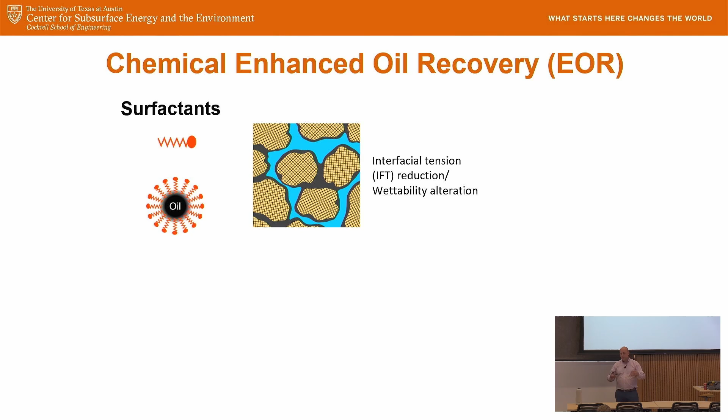Surfactants are designed to reduce the interfacial tension, change the wettability, and get some of that capillary trapped oil. Surfactants are basically like detergents or soaps, the same way you clean your dishes or clothes in the washing machine. It reduces interfacial tension so you're able to produce some of that oil, intended to capture the capillary trapped oil.

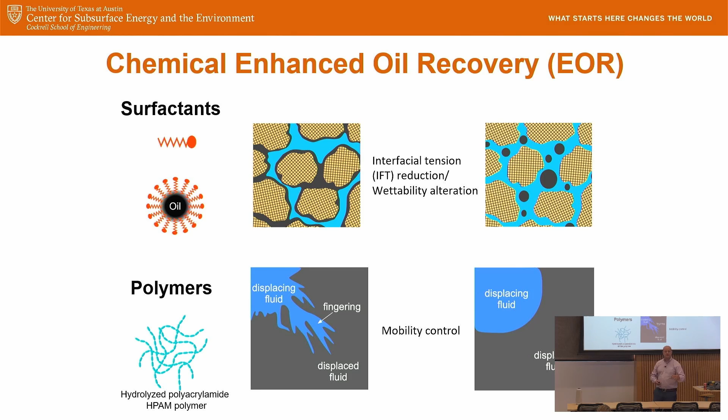For the unswept oil, that's what we use polymers for. These are usually aqueous-based polymers, thick fluids, kind of like the consistency of hair gel. They're intended to improve mobility control, so instead of having poor viscous fingering, you might get a more piston-like displacement. Key thing about polymers is they're intended to get that unswept oil, not the capillary trapped oil.

Conventional wisdom and theoretical analysis says polymers are going to get the oil out sooner, but not get more of it, meaning they won't get the capillary trapped oil. What I hope to show today is that when polymers are designed and tailored with the right rheology, they can actually recover some of that capillary trapped oil, or what I'll call residual oil saturation. That's what I hope to show.

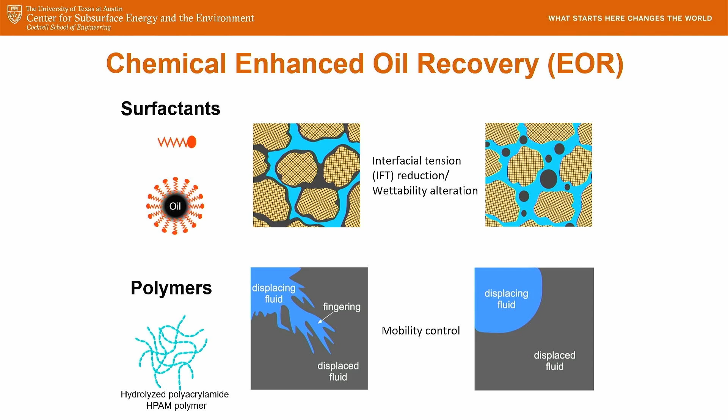Where this came from was really about 15 years ago. I was talking to Professor Gary Pope in our department, and he showed me experiments done a long time ago. Two experiments in two similar cores, a water flood and a polymer flood, gave very different residual oil saturations. It appeared that this polymer flood, which had viscoelastic rheology properties, had a lower oil saturation.

Now, it could have been because there were two different cores. It could have been that if you had done the water flood for another 100 pore volumes, it would have eventually gotten down to that oil saturation of about 20%. So that really wouldn't have been capillary trapped oil, it would have been mobility control, which is what polymers are supposed to do, or it could have been something else. But nonetheless, it was interesting.

At the time I was a pore scale modeler, I'd done all modeling up until this point, and I tried to tackle this problem from a modeling perspective, and realized it was too hard to do at that time. There are two reasons I love to give this presentation: one is that this project turned me into an experimentalist, and the other, as you'll see throughout, is that we use lots of different tools, techniques, and approaches to try to solve the same problem. So that was the motivation for this.

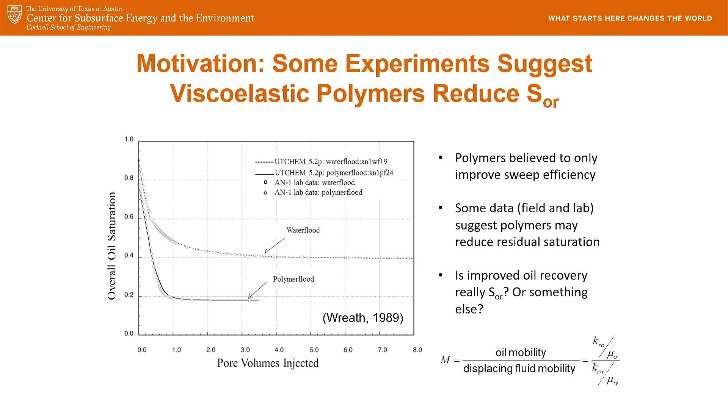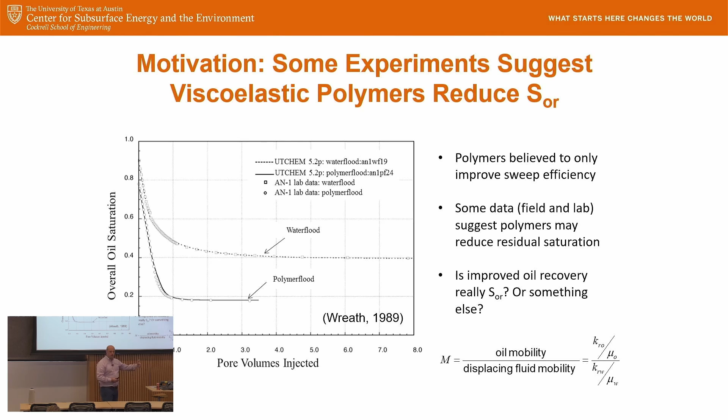I'm going to introduce some dimensionless numbers. One you're probably familiar with if you work in petroleum engineering is mobility ratio. What you want is a mobility ratio of less than 1 to get good piston-like displacement, that's what polymers do because they're more viscous. Mobility ratio above 1 gives that poor displacement, like in the picture from the previous slide.

Another important thing is a capillary desaturation curve, the classic textbook view of a CDC. We're looking at residual oil saturation versus the capillary number. A typical water flood might be right here, in this region. So if you increase the viscosity by maybe a factor of 10, like polymers do, you just push it over here. That's why conventional wisdom says polymers aren't going to do anything for residual oil saturation.

Now, if you reduce the interfacial tension by several orders of magnitude, like surfactants, that's when you get this lower residual oil saturation. But the polymers shouldn't have any impact on residual oil - we'll see if that's true in our experiments. We define this capillary number as the ratio of viscous to capillary forces, depending on how you define it: permeability, pressure drop, interfacial tension, length of the core, or if you substitute Darcy's law, velocity and viscosity. So maybe we're going from here to here, from a water flood to a polymer flood.

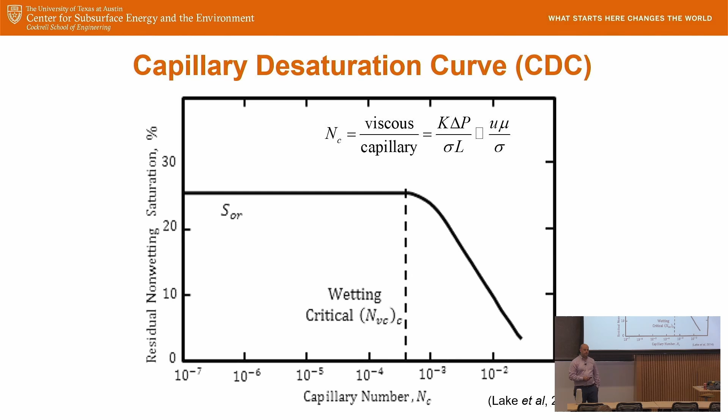Some interesting things about our polymers is that they are non-Newtonian. Specifically, they're almost always shear thinning, and sometimes viscoelastic. Here's a typical viscosity versus shear rate curve you'd get in a rheometer. There's a flat plateau here, and the red curve is what I get in the rheometer. The two match really well there, and then you get the shear thinning behavior.

If you do the same experiment but in a porous medium, like a core, there's a deviation at some point, and you start to get shear thickening sometimes. That shear thickening is usually attributed to viscoelasticity.

More on viscoelasticity - we can measure the relative elasticity by doing an oscillatory shear experiment in a rheometer. This is the storage and loss moduli, G prime, G double prime, versus oscillatory shear. The intersection of these two is approximately the relaxation time of the fluid.

So it's the inverse of that. Right here, it looks like this is 1, that's 2, so I would call the relaxation time 1 divided by 2, or 0.5 seconds. Okay, so that's a relaxation time.

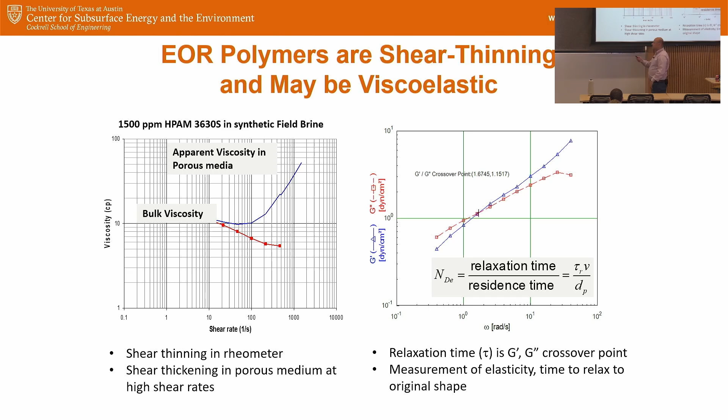So I'm going to use a dimensionless number - the Deborah number, which is the ratio of the relaxation time to the residence time. Tau is the relaxation time, V is the velocity, dP is like the grain diameter. I'll talk a lot about this dimensionless Deborah number, and we can increase it by increasing the relaxation time, which is a function of things like salinity, polymer concentration, molecular weight, type of polymer. But sometimes I'll also increase the velocity, and that will also increase the Deborah number.

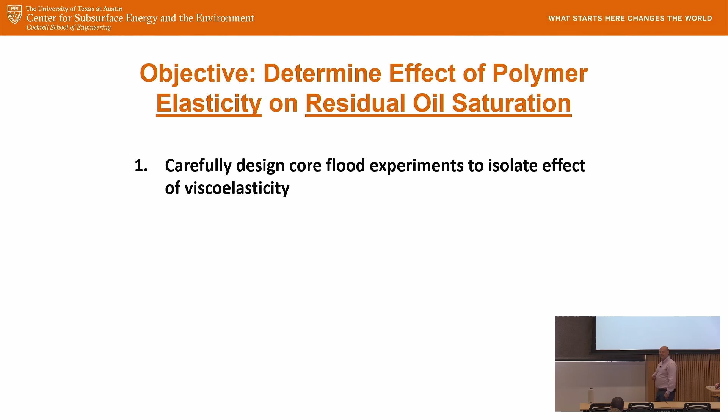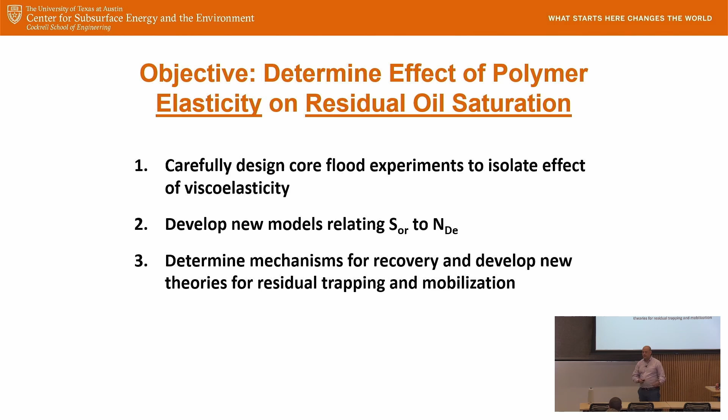My objective setting out was to go back and look at those experiments that Dr. Pope showed me and do a very careful set of experiments to determine if polymer elasticity actually affected residual oil saturation, which would go against decades of conventional wisdom on how polymers worked. So we designed core flood experiments to isolate the effect of viscoelasticity, then developed new models relating residual oil saturation to the Deborah number, determined if that was true and what mechanisms were causing this - because it goes against everything I teach in my water flooding class - and demonstrated the scalability by implementing into field scale reservoir simulators.

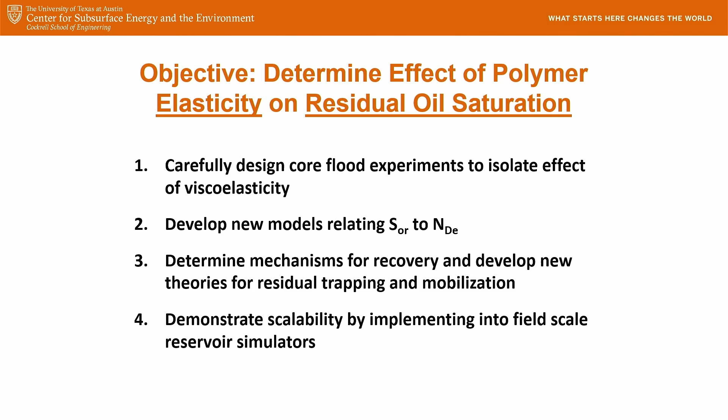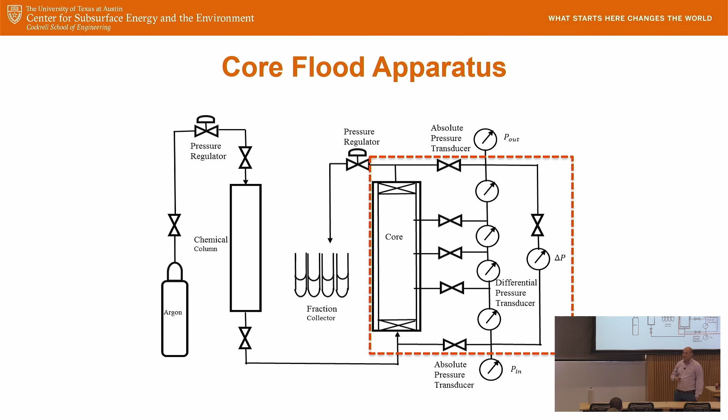So really, a lot of different techniques and scales. Let me start with some core scale experiments we did. This is a typical core flood apparatus. We did some with constant pressure using an argon cylinder, and some at constant rate with a syringe pump. We had our chemical column where we included the polymer, our foot-long core set vertically, and pressure taps along there so we could see where oil banks and stuff were. That was our core flood setup.

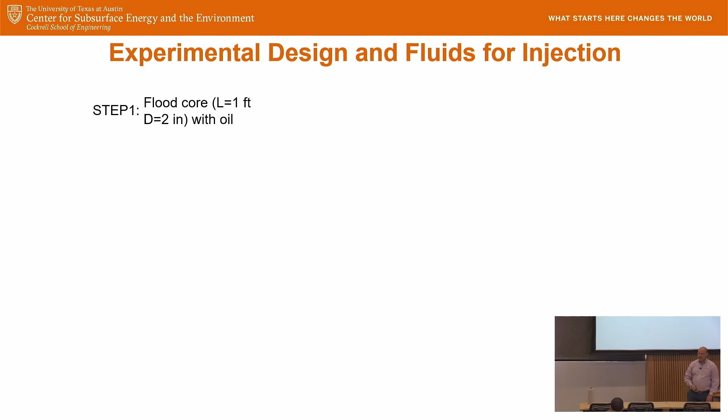We probably did, in total, 2 or 3 dozen experiments. I'm just going to show you a few. The experimental design, in general, was something like this: first off, we would saturate it with brine, or salt water - so we'd saturate the core with brine.

Then we'd inject oil, sometimes low viscosity oil, sometimes high viscosity oil, and we'd have a starting point of maybe 85% oil saturation, not too different from a virgin reservoir. Then we would do our water flood, a brine flood. Most of these experiments were at ambient temperature and pressure, not necessarily reservoir conditions, but I was trying to answer some fundamental questions, and that served this purpose.

We'd inject the brine and do many pore volumes, and we thought we were at residual oil saturation. But some people might say, were you really, or did you have some unswept oil left behind? Remember, you can leave behind unswept oil or residual oil, and we wanted to be extra sure we were at residual oil saturation.

So what I did is, in most of our experiments, we injected glycerin. Glycerin's a Newtonian fluid, it's aqueous, but it's got high viscosity, so better mobility control. We injected maybe a couple pore volumes, and then we were really, really sure we were at residual oil saturation. Maybe we got 1, 2, or 3% oil out from this glycerin, but at that point there's no reason to believe we're not at residual oil saturation. We would never do that in a reservoir, but we're trying to answer fundamental questions.

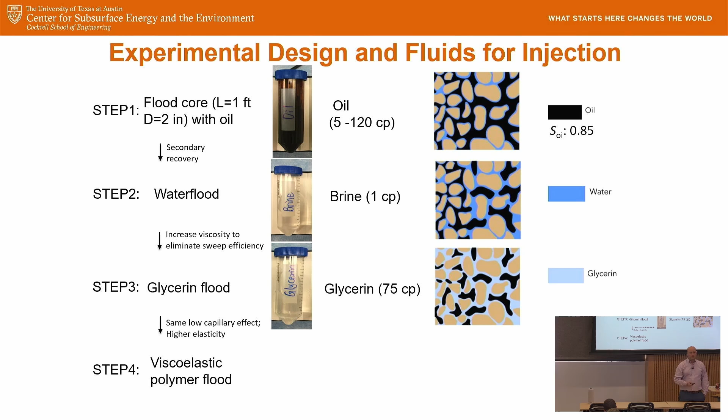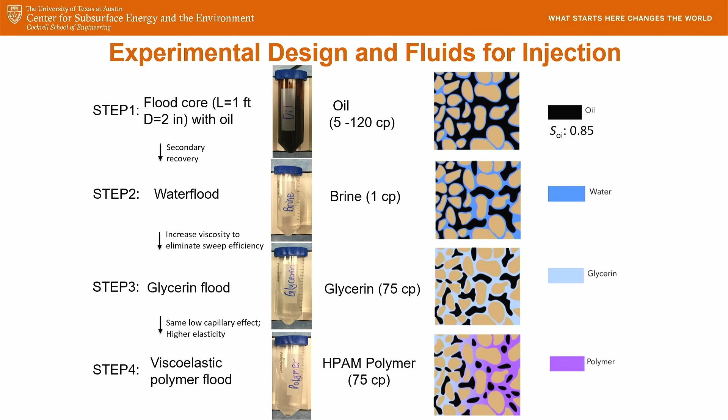We wanted to see if we could reduce residual oil. At this point, no more mobility control, we're not going to reduce the interfacial tension at all. So we do our polymer flood, same viscosity, same mobility ratio - remember the dimensionless property M I defined earlier. What we found, and what I hope to convince you, is that surprisingly we almost always got significantly more oil out, meaning we reduced the residual oil saturation from the polymer flood, even though we were already at residual oil saturation and hadn't increased the mobility ratio at all. Let me show you an example of an experiment where we did that.

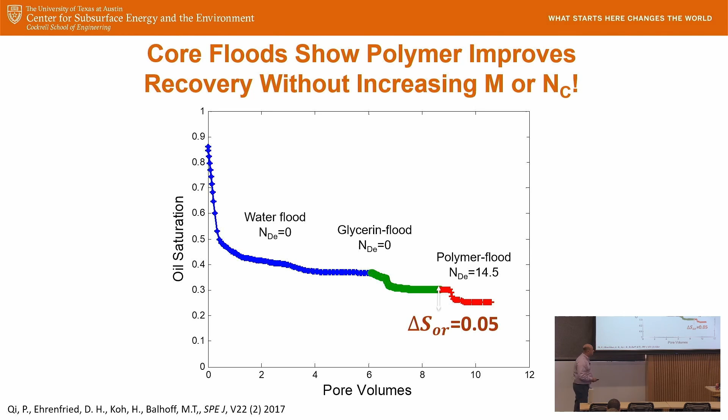We would see this many times. So to be extra sure we're really getting residual oil saturation, we did this particular experiment in a CT scanner. We have a medical CT scanner in our department. Sometimes we use this by doing a scan either before and/or after the experiment. This was unique because we did the scans dynamically - we did them during the experiment, so we actually set up the experiment in there.

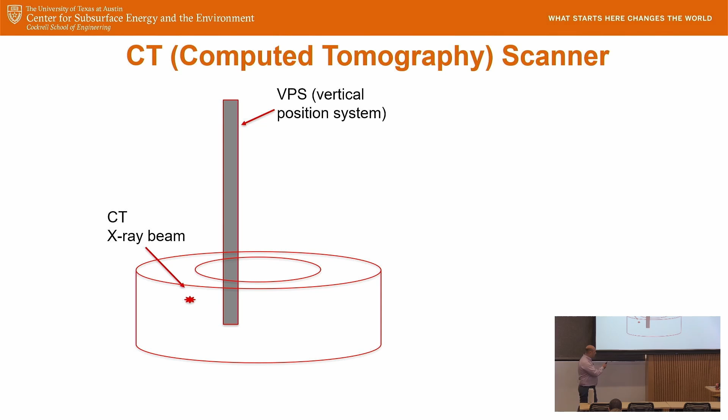So we've got this CT scanner, and what we've got is a vertical positioning system. We've got this X-ray beam that goes around, and we've got the core attached to the mount - that's the vertical part. We've got our X-ray beam go around, and we can take scans around that cylindrical core, so we can image it.

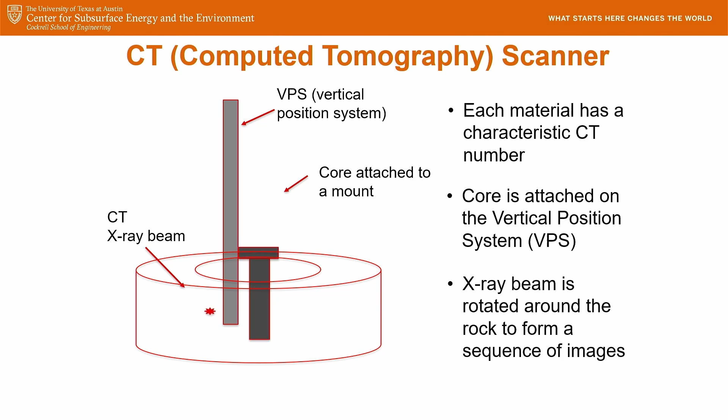Here's a picture of the actual CT scanner we used. This scanner is about 15 years old now - we just replaced it with a brand new CT scanner, but this is the one we used when we did these experiments. You can see the vertical positioning system, and here's the 1 foot long sandstone core that we did, and we did those images.

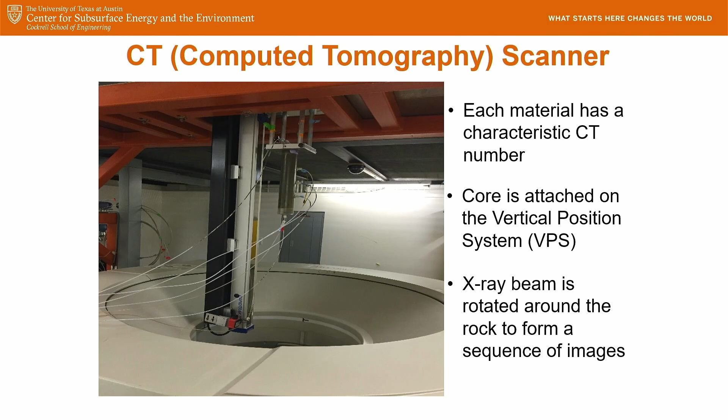So what we found - this is from that experiment I showed you - these are images along the core. We did every centimeter, so there's 30 of them because it's a 30 centimeter long core. I'm just showing you 5. I probably shouldn't show you the first and last one because they're literally the edges, and no matter what you're going to get some sort of end effects. But let's pay attention to the middle 3.

Okay, and the colors correspond to oil saturation. What we see is that this is at the end of the glycerin flood, and this is the end of the polymer flood. What we're seeing is that you're actually seeing a reduction in some of those pixels of oil saturation. It's not just picking up unswept oil on those images, but reducing the residual oil saturation. You see this goes from 26 to 21%, for example.

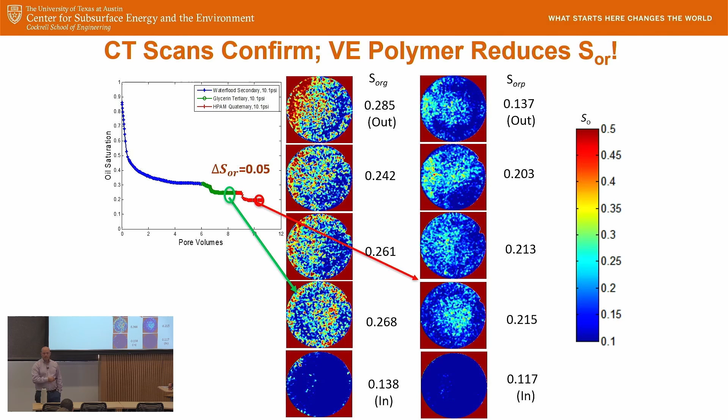Okay, so that confirmed that these polymers are in fact reducing SOR, even though conventional wisdom says that it shouldn't, at least from traditional Buckley-Leverett theory.

We've done dozens of these experiments to show this. We've varied the rock type, Bentheimer, Boise, Berea, high and low viscosity oils. This is one where we did a low viscosity oil. Because the mobility ratio is already so good, much less than 1, we didn't bother to do the glycerin flood, but we got an additional 11% oil out from the polymer flood.

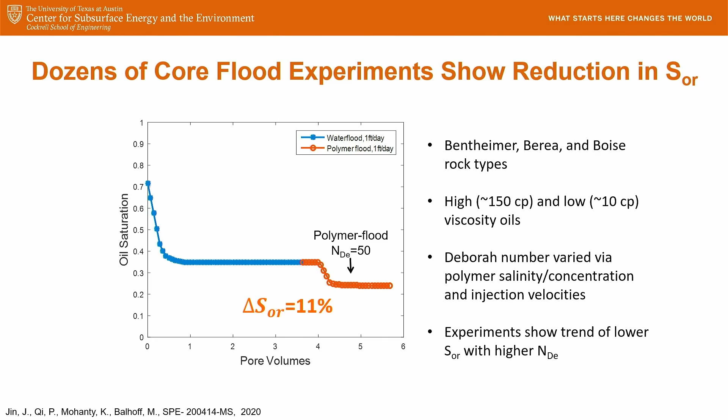We varied the Deborah number by changing that relaxation time, meaning changing the salinity, concentration, molecular weight, but we also varied the injection velocity. And what we saw is, generally speaking, the higher the Deborah number, the lower the final SOR, right? So there was a correlation there. So more elastic fluid, the more oil you got out, okay?

And so here was a collection of some of our data. This looks a lot like the capillary desaturation curve that I showed you before. So I call this an EDC, an elastic desaturation curve, because this is a plot of the ratio of residual oil saturation after a polymer flood to the water flood or the glycerin flood versus Deborah number on a logarithmic scale. A lot of scatter, okay? You can't do core floods without getting a lot of scatter because every rock's a little different, but generally a trend, higher Deborah number, lower SOR, and we developed kind of a simple empirical equation to describe that.

So really anything above a Deborah number of 1 or certainly 10, you start to see a big effect, right? And you can control that Deborah number by maybe tailoring the rheology so it's got a maximum relaxation time, or probably what's less practical in the reservoir is to increase your velocity, because that Deborah number was relaxation time times velocity divided by some sort of length scale.

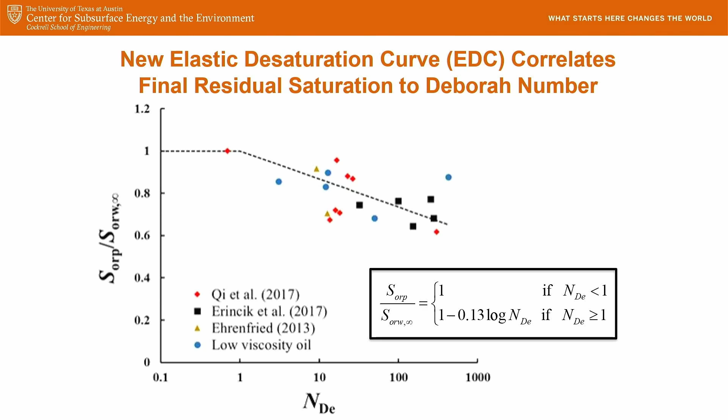So we did some more experiments, and most of the experiments I showed you before were done by a PhD student, Peixi Qi, and then had a new master's student. He wanted to do some experiments, and so we had him do these and followed a very similar process as what Peixi did. So we did the water flood or the brine flood, then we did glycerol. In this case, you got a little bit of unswept oil. But then we did the polymer flood, had the same salinity as the other fluids, and had a high relaxation time.

He got 14% more oil out, which is fantastic, right? I mean, I showed you 5%. I told you sometimes closer to 10%. 14% was awesome, it was a little on the high end. And this was his first experiment, so me and his co-advisor, Gary Pope, said, well, we trust you.

I'm sure you did the mass balance and calculated the oil right on the outward part, right? But let's do a tracer test as a verification that you really got 14%, not like 9%. And so he says, sure. He says, look, what we want you to do is just change the salinity for part of that tracer test. And then, from that, you can do some math and figure out what your actual oil saturation difference is.

So he comes back to us and he says, oh, I did your tracer test and I got 15% more oil out. We're like, what are you talking about? And he's like, yeah, I got 15% more oil out. And it's like, the final oil saturation is 7%. And we're like, there's no way. You didn't get 15% oil out by just changing the salinity to something higher.

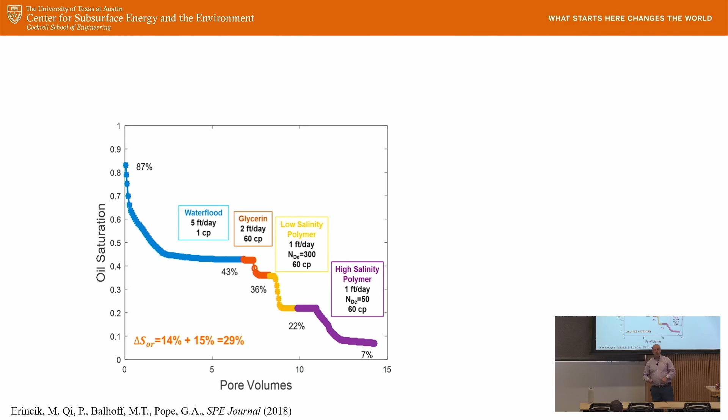What we found is that chasing this viscoelastic polymer flood with an inelastic polymer flood reduces SOR even more. If you reverse the order, it doesn't do anything, at least for the high salinity polymer flood. Although if you start alternating these, we tried this - it's not particularly practical, but we kept alternating for many pore volumes, and it kept happening, but maybe with diminishing returns. You get a little bit more oil each time, but eventually...

So perhaps our most impactful and shocking discovery was that chasing the viscoelastic polymer with an inelastic polymer reduced SOR to very low levels. In this case, we got almost 30% more oil out from the glycerin flood, which is really amazing. We were able to repeat this many times - 3 different students were able to see this effect, which is really cool.

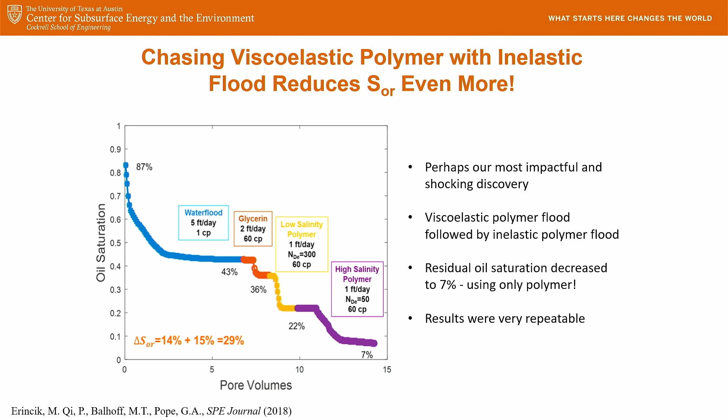So all this was very interesting - we're seeing these macroscopic results. That begs the question, why? Because if I'm teaching my water flooding class, teaching mobility control, Buckley-Leverett theory - none of that explains what we're seeing here.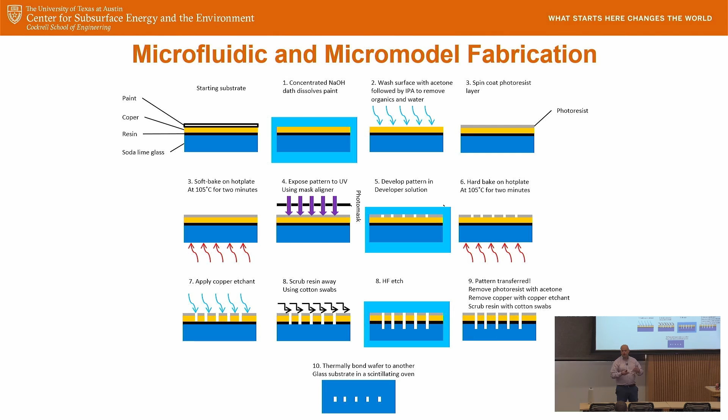So then we went back to the pore scale and tried to observe some of these things. For the last several years, we've been doing microfluidics and micromodel work in our laboratory. I won't go through all the details here, but we fabricate our own chips - we have a clean room, we create them out of glass, and we can create almost any geometry we want to.

We did some with little 1D channels, microfluidic channels. You can see here we've got these pores connected by little throats. Let me show you some experiments we did with glycerin. What you see here is an oil droplet, and we injected a certain flow rate, which corresponds to a certain capillary number. We injected water or glycerin - it didn't matter much.

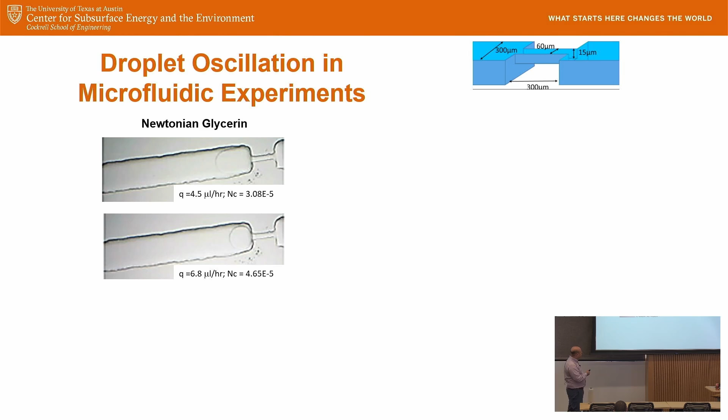We saw the same sort of thing - if we increase the flow rate and the capillary number, this oil droplet would get smaller and smaller, and eventually it would go all the way through. So the size of this oil droplet, we found experimentally and were actually able to derive, was proportional to the capillary number to the -1/3. It didn't matter if you had brine, glycerin, or a surfactant solution - it would follow this type of behavior.

I talked to my students and said, well, now let's do it with viscoelastic polymer - maybe we'll get something different. Maybe the oil droplet will go through sooner and deviate from this theoretical model of droplet size versus capillary number to the -1/3. What we got was, again, kind of surprising - almost the opposite of what we'd hypothesized.

This is with the viscoelastic polymer, whether it be HPAM or polyethylene oxide. What you can see here is if you get to a high enough velocity or capillary number or Deborah number, you start to see these oscillations or vibrations, and the droplet would never go through. Now, I thought that was kind of weird because I thought it was going to go through sooner at a lower flow rate or something. Now this is actually kind of blocking things.

Okay, I don't know what's happening. One of my hypotheses is that what it's actually doing is acting as a conformance control agent - maybe it's blocking up some pores and allowing oil to be pushed out in other places. It's still a working hypothesis, but something neat is happening here with a viscoelastic polymer that doesn't happen with purely viscous liquids.

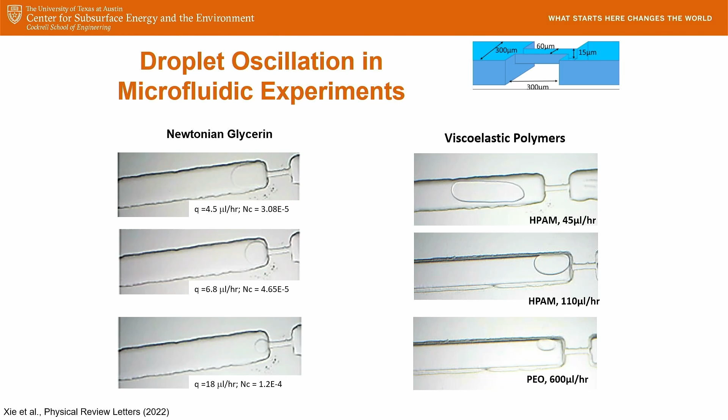So here is that droplet pore size versus capillary number to the -1/3. Here's our theoretical model. If you've got elastic effects, you start to see some deviation there, but kind of the opposite deviation that I had hypothesized.

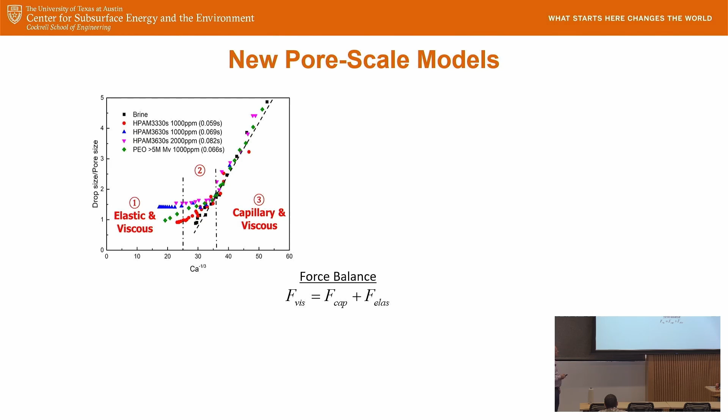My students did a force balance and derived a new expression which now has Deborah number in there. So the dimensionless length is capillary number to the -1/3, divided by one minus some constant times the Deborah number. What you're looking at here is distance versus time, showing periodic oscillations with those droplets.

Here is amplitude versus flow rate, or Deborah number, and that's linear as well. So we created a kind of semi-empirical model that says the amplitude is proportional to a Deborah number minus some critical Deborah number.

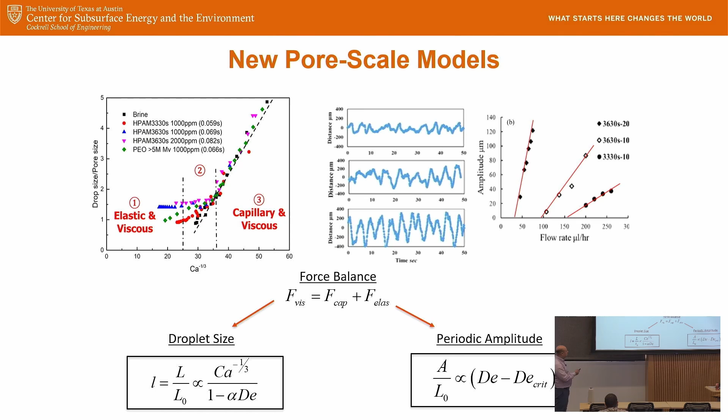Okay, so this is some pore scale observations. We also did some lattice Boltzmann simulations - Newtonian or viscous fluid versus a viscoelastic fluid.

You see, in both cases, you get something not all that different than what we saw in the experiments. There's a lot of approximations and simplifications in the model, so not really a quantitative prediction, but qualitatively getting some very similar type behaviors.

And then this is the distance of the oil droplet from the pore throat versus time. You see the Newtonian fluid eventually goes to zero, it goes through, but you get these vibrations or oscillations with the viscoelastic fluid.

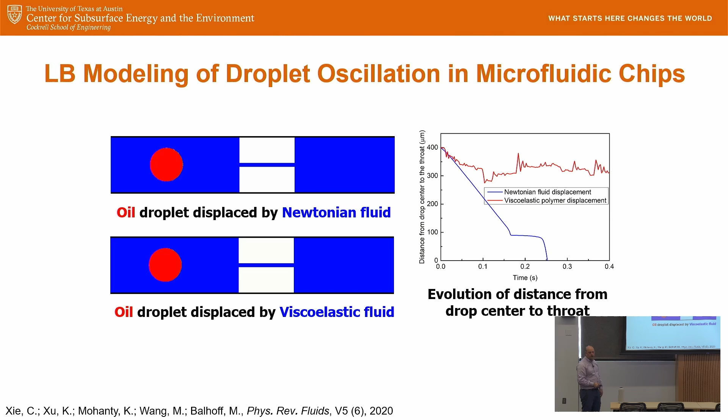Very turbulent. So there's something called viscoelastic turbulence - not the same thing as turbulence at high Reynolds numbers, but very analogous to that, because the Reynolds numbers were very close to zero in these cases. But that turbulence pulls out those oil droplets.

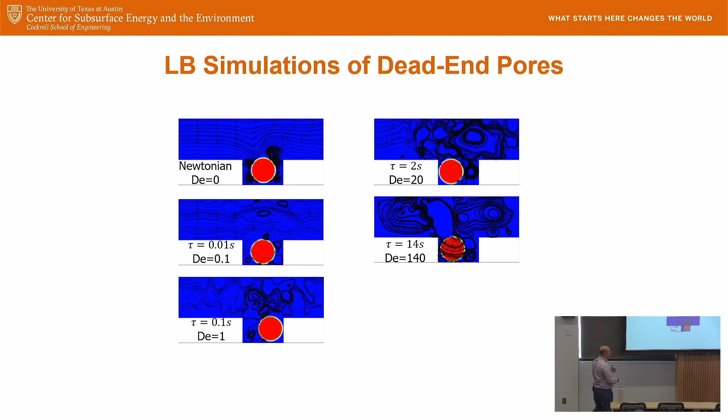So again, we're kind of developing some hypotheses. And even though I've been doing this for a while and maybe closing the book on some of this, I would still call them hypotheses. I don't think I've answered all the questions, but certainly some unique things are happening when the polymer is viscoelastic versus purely viscous.

Here was one last geometry. This is called a pore doublet model. You've got kind of a pore up there and a pore - this is the doublet. In this case, what you saw is that this oil droplet went through, but the bottom one was trapped. That's with an inelastic fluid.

Then we tried a viscoelastic fluid. So this was maybe like a Maxwell model or something. Interestingly, the opposite oil droplet went through. Is it better? Is it worse? The same? I don't know.

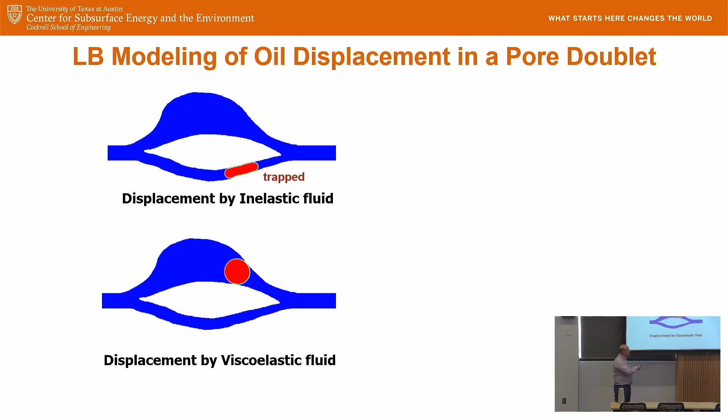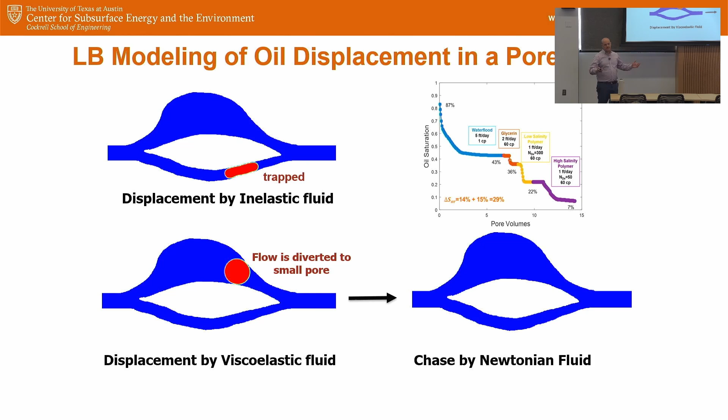It's different. Okay. But what's neat is if I did that viscoelastic polymer flood and I got that, and then I chased it with an inelastic flood, then it pulls that out too. So maybe, just a hypothesis, but maybe that explains why when we chase the elastic polymer flood with an inelastic polymer flood, it got more oil out. Because that first one got this oil, and the second one got that oil, right? But if you use one or the other, you couldn't get both. So you're getting different kinds of oil in these types of things.

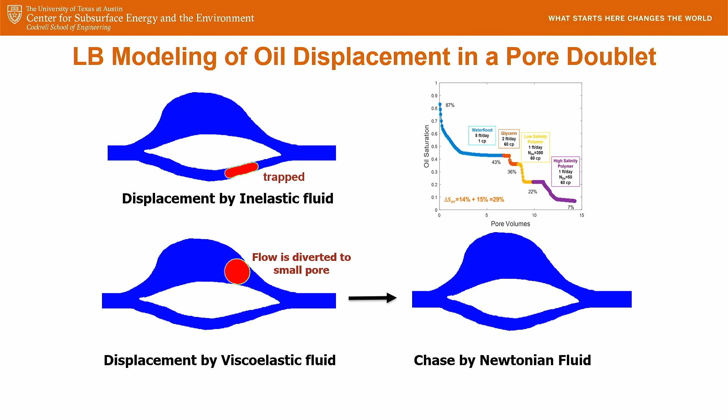So these were some Lattice-Boltzmann pore level simulations. Back to my microfluidics - I call microfluidics usually like single channel geometries. I call micromodels like microfluidic porous media on a chip.

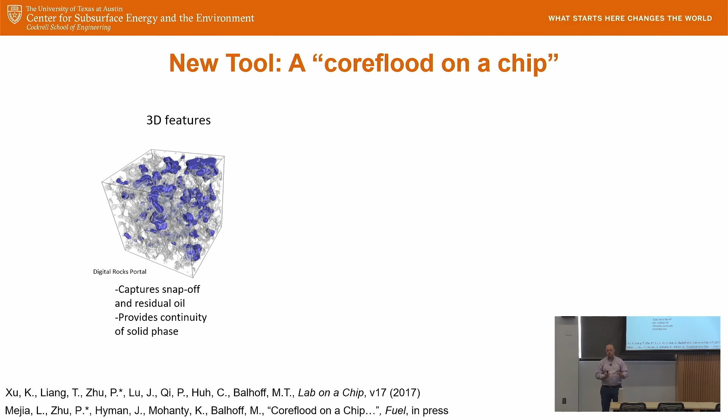So most micromodels are relatively small. Think of them like Lego chips, but they're maybe like a square centimeter. They're two-dimensional, but when we have our core flood, they're three-dimensional.

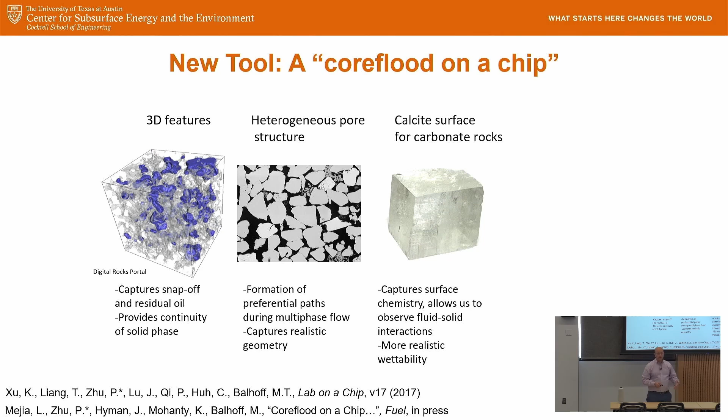They're very heterogeneous, obviously, like real rocks are heterogeneous. They have unique surface chemistry, right? So maybe calcite surface for carbonate rocks, and they're quite long. Okay, like our core floods were like a foot in length.

So what we set out to do is could we create a micromodel that - it's never going to be a replacement for core floods - but could it have some of these same properties? Could it be three-dimensional? And we created what we called a 2.5D micromodel, so it had three-dimensional properties. That's important because that allows you to have capillary snap-off and also continuity of the grain phase.

Lots of micromodels are heterogeneous. A lot of times what they do is use thin sections, but for really getting larger scales, as I'll mention in a minute, that's really hard to do.

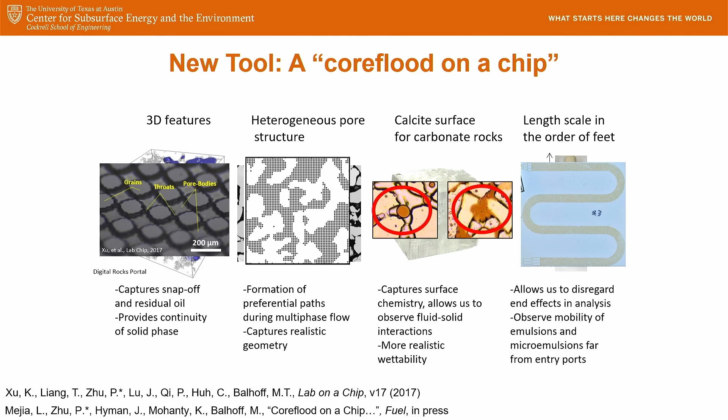So what we did is use a random network generator that was statistical, based on a real micro CT thin section. We're able to coat our micromodels with calcite, so we can control the surface chemistry. One thing I really like, and that's why I call it a core flood on a chip, is because it's the length of a core flood. It's got this serpentine geometry, but it's like 1 foot in length. In fact, we've gone 1.5 feet in length. So by combining all of these things, I'm not going to call it a replacement for a core flood, but it's more core flood. It's more rock-like.

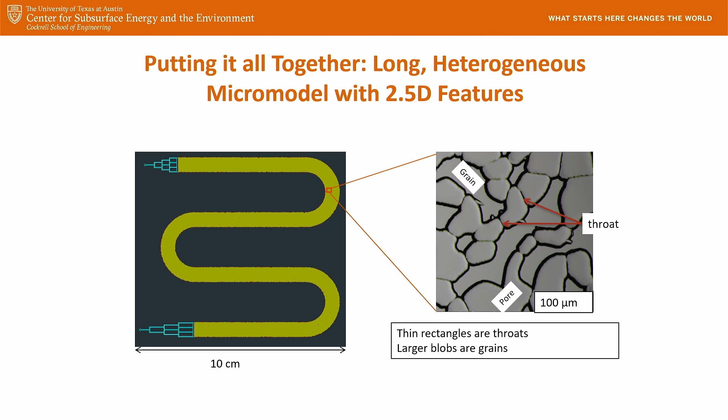Okay, so we did some experiments with this. Here's our chip: 10 centimeters by 10 centimeters, but 30 or 40 centimeters long because of the serpentine geometry. If you look in, you've got grains and throats and pores. It's very heterogeneous. We can do experiments just like we do in a core, so we can measure permeability because we've got pressure taps on either side. We inject at a certain velocity, so we can measure the permeability of our micromodel.

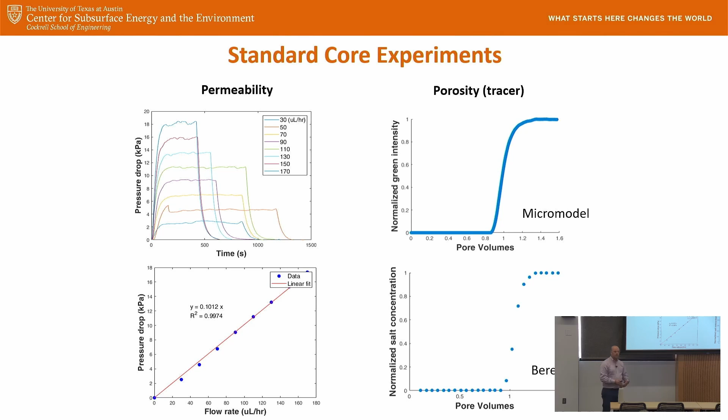We can also do other tests that we normally do, like tracer tests. So what you have on the top is the micromodel, and the bottom would be one from a Berea core. Qualitatively, you're getting the same thing. And from this, you can determine porosity and heterogeneity and stuff like that.

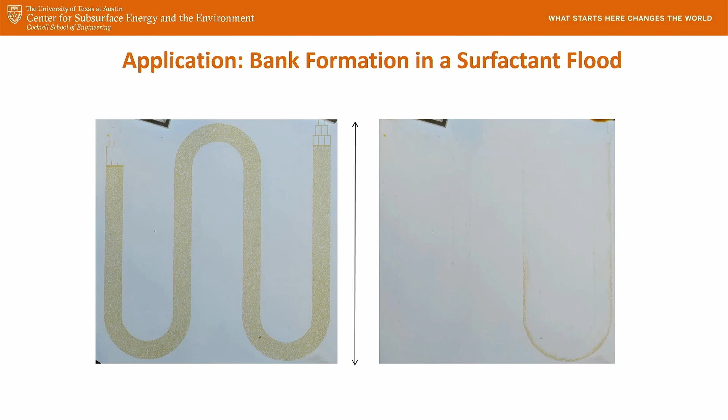I really like this because I think this core flood on a chip could really be used as a screening tool for a lot of EOR type things, because core floods are expensive and time consuming. It's not going to replace it, but we could do these with a very small footprint. We can probably do a dozen of them simultaneously, and they don't take as long to start and finish. So maybe you do a few dozen of these experiments, and the ones that are most promising, then you do the core flood.

Okay, and if you zoom in, you can actually see oil banks form. This is a snapshot of that surfactant flood at a given time. Clearly, you've got oil buildup right over here — that's your oil bank.

Remember that oil saturation is not by mass, it's a volume percentage. We're determining this through image analysis, so we're counting pixels of where the oil is. So what we're really seeing here is an increase in the volume percentage of pixels with oil in them. What was happening, and I'll show more of this later, is that the oil is swelling. So by mass, there's not more oil in there — that's impossible. By volume, it's taking up more space because of this swelling, possibly with some of the brine creating an emulsion with it.

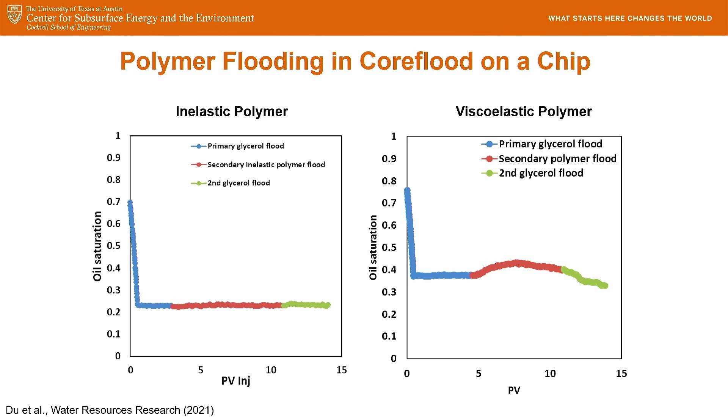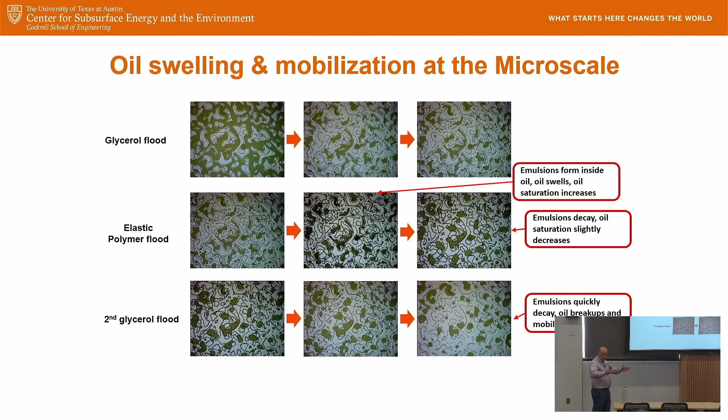We do everything by image analysis, but really cool results there. These are small scale images, so foot-long core, but we're zooming in to, say, a millimeter scale here.

And you have this glycerol flood that happened first, then you had this elastic polymer flood, and if you could look closely enough, there are places where you can actually see the oil volume takes up more space than it did before. And then you do the second glycerol flood, all of a sudden those emulsions went away, some of this oil started to move downstream, we're starting to produce oil. Really neat stuff there.

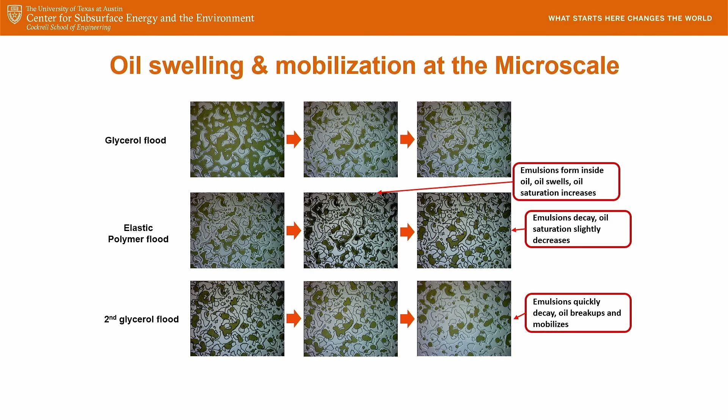I'm going to be transparent. I chose geometry and conditions that I thought would give me more promising results, but I'm going to do some sensitivity analysis later to show that we get promising results no matter what.

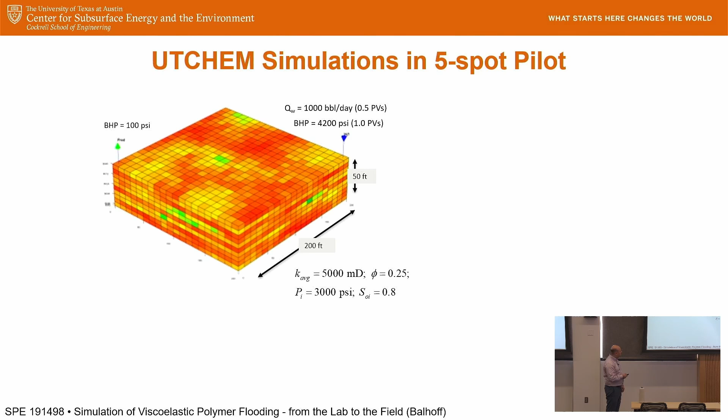Yeah, and that's what that is. So we used a Dykstra-Parsons coefficient and a correlation length to do that. Some key properties are in yellow.

Focus on this number: the residual oil saturation is 30%. So from a water flood or an inelastic polymer flood, it doesn't matter if I injected an infinite number of pore volumes, I would never get below 30%, right? That's oil that's going to be left behind forever unless we do something to reduce that.

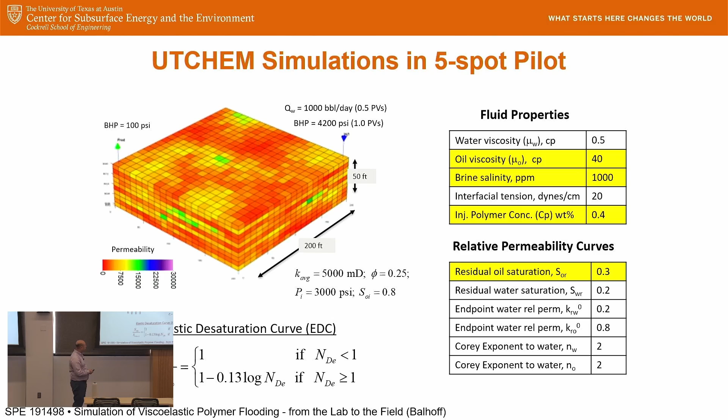I input that elastic desaturation curve empirical model that I developed from the experiments into the reservoir simulator. What we're looking at here is the Deborah number. Remember, I said that anything over 1, and certainly over 10, is impactful. Near the wellbores, where we have very high velocities, we get very high Deborah numbers. But even in the middle of the reservoir, somewhat high Deborah numbers.

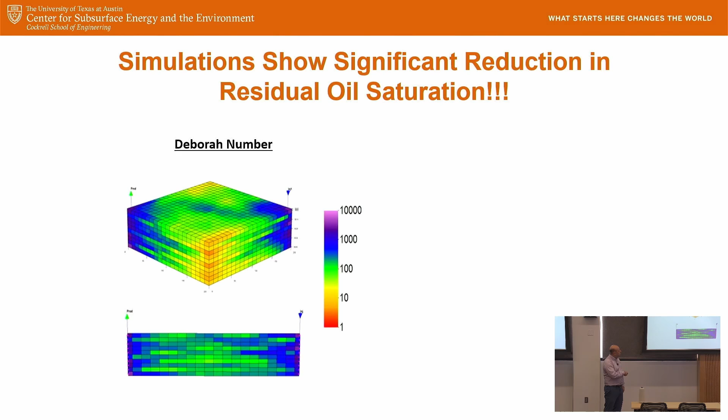This is a cross-section between the producer and the injector, and you can kind of see what that is. That's Deborah number, which is correlated with residual oil saturation. So again, residual oil saturations as low as 15%. Remember, we didn't expect to get lower than 30% from a water flood or a polymer flood, but this is the elastic polymer flood, which reduces SOR. Even in the middle of the reservoir, we're looking at 25%.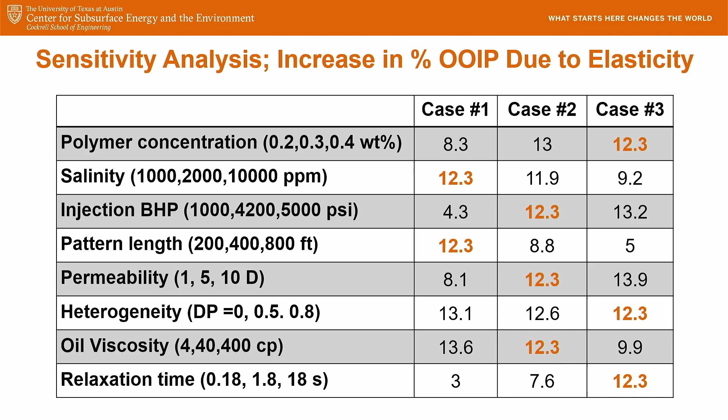Even that's significant. So I mentioned that I chose maybe optimal or very good conditions for this. That's what got me the 12%, but even not so good conditions was still effective.

So some final thoughts: the viscoelastic polymers do reduce residual oil saturation. That confirmed our hypothesis, but went against conventional wisdom of how polymer flooding works.

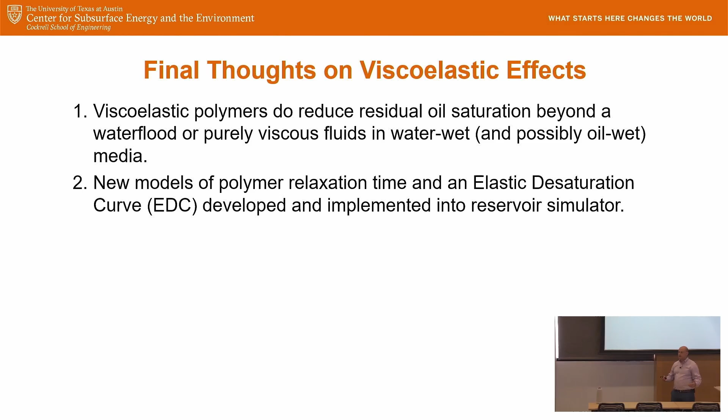We developed new models, what I called an elastic desaturation curve, which relates SOR to Deborah number. We put those into the reservoir simulator.

We found that not only does a viscoelastic polymer reduce residual oil saturation, but if you chase it with an inelastic polymer flood, it reduced SOR even more. We got some saturations down as low as less than 5%, which is unheard of for a polymer flood. That's what you get maybe with surfactant floods.

We did pore scale microfluidic micromodel experiments, as well as lattice-Boltzmann simulations, to provide some new insights, maybe new hypotheses as to why we're getting what we're getting. But I don't think all the answers are there yet. I don't have all the answers still, but we're definitely seeing some possible explanations for our macroscopic observations.

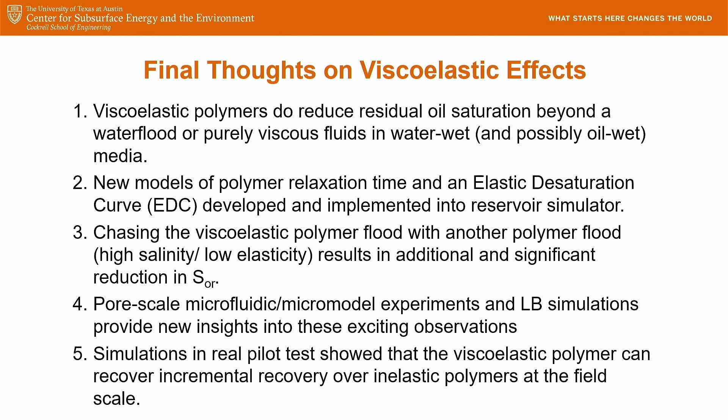And then simulations—I shouldn't call it a real pilot test, it was a test pilot case in the simulator—showed that the viscoelastic polymer can recover incremental recovery at the field scale. One of the things I'd largely wondered is, is this just a laboratory scale thing? Will you get to high enough velocities and Deborah numbers in the field to actually make a big enough difference? Our answer is that under the right conditions, yeah, you can. It's not necessarily just a near wellbore thing.

So with that, I just want to acknowledge all the many students and postdocs that have worked on this problem. What I really like about giving this presentation is showing so many different aspects, so many different scales, experiments versus models, and that was only possible because I had such wonderful people on my team with different expertise that were able to contribute.

We collaborated a lot with our faculty at UT Austin on this, and it was supported through our chemical EOR JIP, and we also had some funding from King Fahd University of Petroleum and Minerals. More on that chemical EOR JIP, I'd like to acknowledge those companies that supported this research.

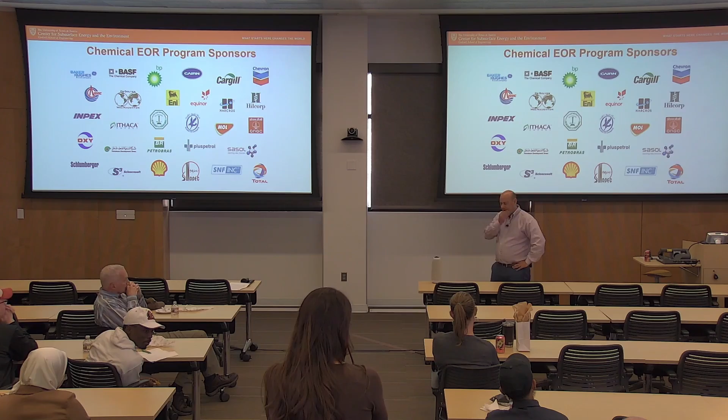Hi there, so it sounds like you haven't done field tests yet, which is understandable, but have you guys run the economics of using that much chemical in the field relative to output? So the question is basically about how to apply this in the field and whether or not it's economical.

Some of the experiments we've done where we've just injected a ton of pore volumes are not going to be economical, and that wasn't necessarily the purpose—it was to answer some fundamental questions. But certainly what we've seen was, for example, this...

This is pretty reasonable, and these were typical pore volumes injected for polymer. What is economical about this is that we're not really proposing to do anything different. We're saying to do a polymer flood, just ensure that the rheology is as elastic as possible.

While we haven't done pilot tests specifically, what we have seen is existing polymer floods that got better recoveries than the simulators and engineers expected. Maybe it was elastic all along. Most of these, we didn't do anything special, we just used an HPAM polymer and tested the rheology, but it was already there, so we may already be seeing this effect in the field. We just may not be realizing it.

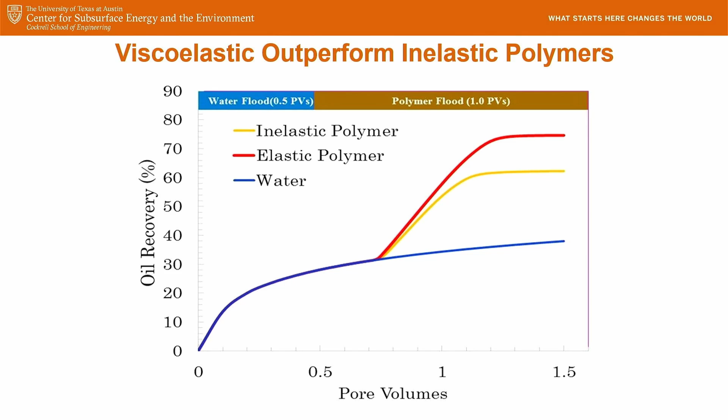Not necessarily, certainly not in this case, because instead of continuing your water flood, you are using a water-based polymer, so it's about the same amount of water. Now, one thing that a lot of people have proposed, and I'm kind of a proponent of, is to forget the water flood altogether and go straight to a polymer flood. I think that might work, and I think it might be the best way to do things.

It's a very difficult sell to managers, because polymer floods are more expensive than water. You tell them, hey, we could just do a water flood and get some oil out, and then decide the next steps rather than jump into a polymer flood. But in reality, that might be the most efficient way to do these floods while minimizing the amount of water you inject.

Thank you. Since I believe this work is directed to the process in water wet formations, does your research happen to consider polymers with surface activity so that it can address issues in oil wet formations as well? So the question is, was this work, which looks like it's for water wet reservoirs, would it apply for oil wet reservoirs?